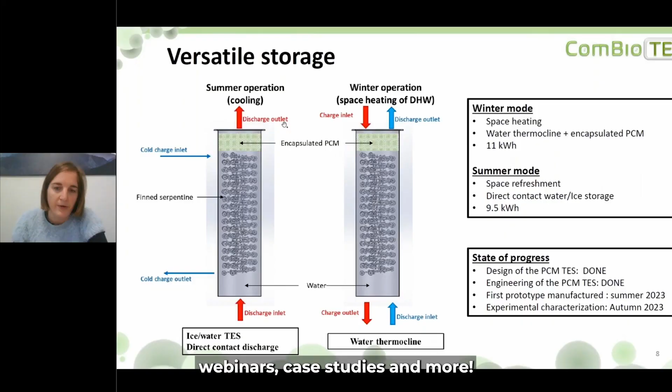Every month we focus on a topic that is key to making Europe's buildings as energy efficient as possible. Exploring that, you can find the latest content such as expert talks, webinars, case studies and more. From architects and engineers to academics and policy makers, we've got you covered.

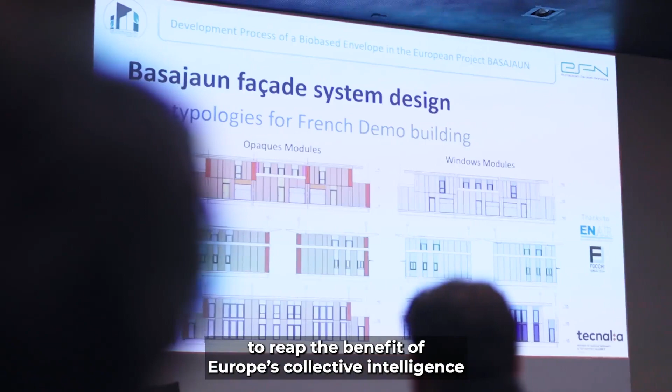Build Up brings together thousands of registered members to reap the benefit of Europe's collective intelligence on all aspects of energy efficiency and renewable energy in buildings.

The Build Up portal benefits from the expertise of our ambassadors. Drawn from industry and academia, the ambassadors bridge the gap between EU and national level and help shape our editorial content. Want to promote your work?

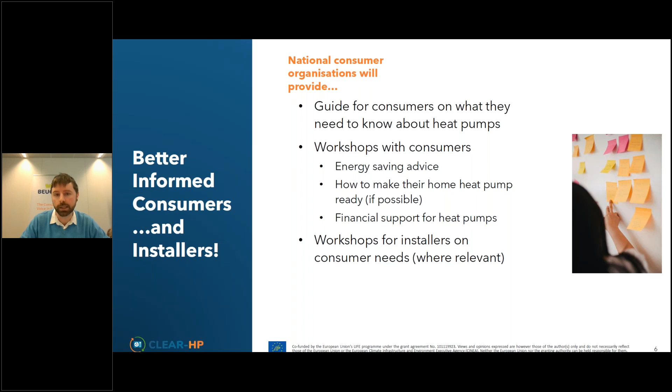They've had a really massive response, a very positive response from installers. One reason being, in some cases, installers can be very small companies, micro enterprises, one or two person companies, and they might have worked in gas or oil boilers for years, and might not have the time or resources to learn about heat pumps, to shift into that world. So that's another thing some of our consumer organizations through the project have already started, which we're really happy to see.

So those are some key points on the project itself. Now I'm going to explain heat pumps from a consumer perspective.

Some of the research we've done internally in BEUC, last year we did a really valuable project called Mystery Shopping, Consumer Experiences when Trying to Buy a Heat Pump, where we got the average consumer who was interested in a heat pump to go through the process themselves of researching what they could find out about heat pumps and how to buy one, having a visit from an installer and getting the quote from the installer, and we've reviewed that whole process.

So here are some of the key questions that consumers came back to us with when we reviewed the process. First one was, where do I get my information? There is a huge amount of information on the internet about heat pumps, and consumers can easily become overloaded, and not all of it is impartial or trustworthy. So they wonder where to get information, which is where the project steps in.

They also have a key question we mentioned earlier: is my home heat pump ready? One of the things we found in this project, which was a concern, was you can get an energy audit of your home, which we would recommend, or you can get a heat pump installer to visit your home, review it, and tell you if your home is heat pump ready, and then they recommend you a heat pump.

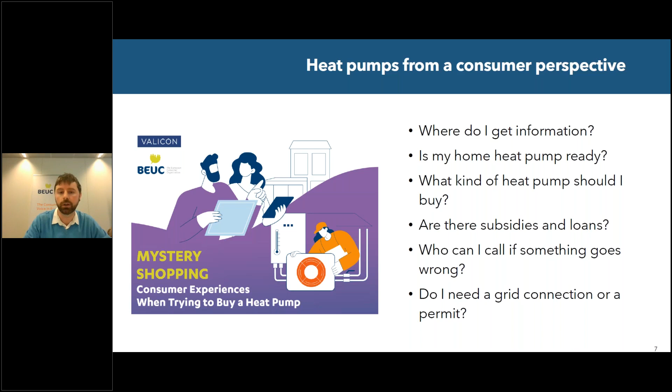So it's a good business case to have good after sales service. And the last question consumers tended to ask was whether they need a grid connection or a permit for their home. There do tend to be problems sometimes with heavily blocked up grids in some countries, and it being difficult to get a new grid connection, which is also a concern that we're trying to tackle through policy.

So what can be done in terms of policy? Just another minute from me. It should be said that there has been good progress at the EU level in the last few years. Look, we have the Fit for 55 package now. We're pretty happy with it: Energy Efficiency Directive, Renewable Energy Directive, Electricity Market Design. Lots of them have been quite ambitious.

And what we need to see now is ambitious transposition at the member state level, something we're going to be working on through this project with our national members. But in terms of things that can be improved, a list of certified heat pump installers provided by the government would be a good place to start. We saw this in Slovenia. We're calling it a best practice at the moment because there's certain criteria that you need to fulfill as an installer to be added to the list that the government provides and regularly updates of heat pump installers.

They also have this type of list in Slovakia, but there's no criteria to get on it. So if you have poor qualifications and are not providing good customer service, you can still be added to the list, which is then not a helpful list for consumers. So there needs to be certification.

Another really important issue you might hear if you dabble in the world of heat pumps: reduce taxes on electricity. We ultimately need not just the upfront cost of heat pumps to come down, we need the running costs of heat pumps to come down. They need to be cheaper to run than oil and gas boilers, because ultimately consumers vote with their pocket, right, and their wallet.

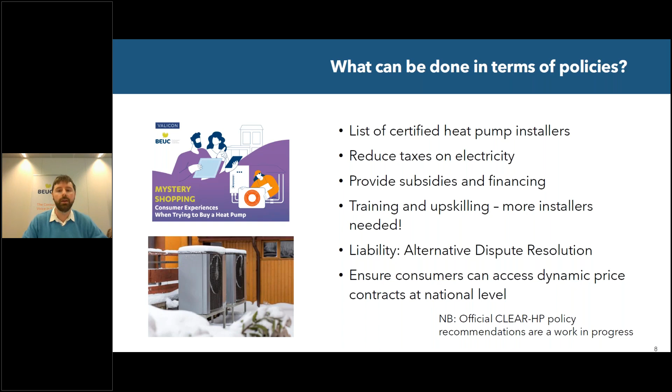Those are the key points from this project. Thank you very much for listening, and I look forward to your questions later. And I'm going to pass on to Street HP.

Good morning, everyone. I'm Pierre-Antoine from Ressorts, and I'm going to talk to you about the Street HP Reno project. Just a quick introduction, I am a member of the Energiesprong team, and our goal is to accelerate renovation of housing and buildings in Europe to the net zero energy level. And now for this project, we are focusing on heat pumps, and I'm going to explain why.

So just to test the slideshow. Okay, it seems to work.

So at first, before explaining the project, maybe a quick introduction about the context, some things that you already know. It's about climate change, it's about the fact that we have to decarbonize quickly our building stock in Europe, but in the world too, because buildings account for 40% of energy consumed in Europe, and about 36% of greenhouse gas emissions. But another topic that is less known is about the social issue.

Now we are seeing the fact that gas and electricity bills are increasing very fast, and that the issue of energy poverty is more and more spread in Europe. Over 41 million Europeans were unable to keep their homes adequately warm in 2022. So we have to succeed in doing this energy jump, transforming our building stock from the current one to a building stock only in class A, B, or C in Europe.

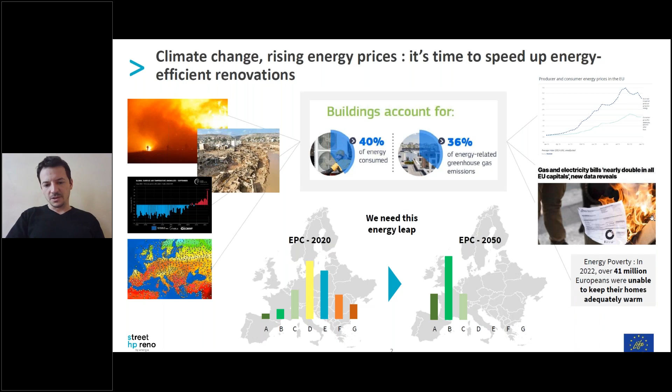If we focus on just energy systems, we know that in the European Union, space heating and water heating are almost 80% of the energy consumption. So it talks about insulation and energy systems, and now we are going to focus on energy systems. But it shows us that we have to make some real choices now in Europe.

If we analyze this energy consumption, we see fossil fuel, and the major part of this consumption is about fossil fuels, fossil gas notably. So we have to change that. But the question now is, if you are a building owner, it's about the strategy you have to apply if you want to change these energy systems in your buildings.

So you can maybe think about gas boiler replacement, but it's about fossil gas. We can imagine that in the coming future we should have green gas, I mean biogas, but it's not already developed in public policies.

And now, after that, you can think about heat pumps, how you can replace your energy systems by heat pumps. But it raises other questions, because it raises the question of which types of housing are adequate for heat pumps, and the way that you are going to do this.

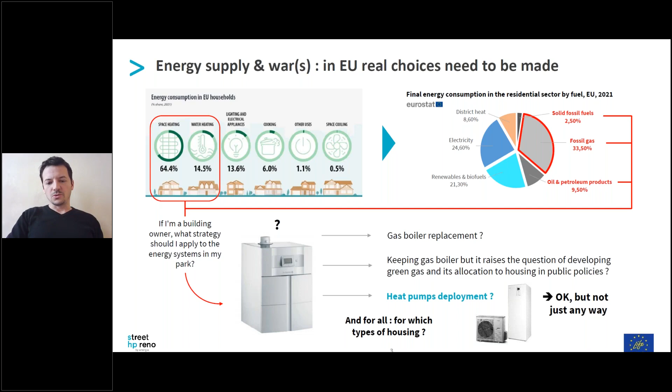So Europe and France want to speed up the deployment of heat pumps to decarbonize residential heating, because we know that heat pumps offer a lot of advantages. It's more ecological and more economical to run than fossil fuel systems, for example.

It's run by electricity, which is decarbonized in France and is being decarbonized in Europe through the deployment of renewable energies. It can provide heating and hot water production. It is really subsidized, and there are a lot of grants offered by governments in Europe. Sometimes it can be combined with other gas boilers, for example, depending on needs. We can imagine hybrid systems.

But the deployment is now progressing, though we see that the pace is not enough. We have to accelerate it, and the fact is it's not always carried out in a relevant manner.

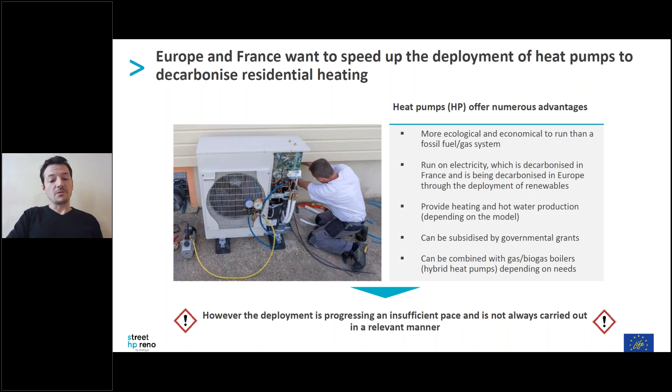Indeed, today there are a lot of obstacles and barriers that we have to tackle. The first one is about the costs. Now we see that the costs are very high, and sometimes they are unclear, because if you ask different installers for a proposal of heat pump replacement, you could have different prices, and you don't understand why.

There is the fact that today heat pumps are deployed in thermal sieves - buildings which are not energy efficient - and it could be a problem because of the efficiency of the system, and the fact that there could be mistakes in choosing these buildings, because there is a risk for the potential energy savings. We are missing energy savings that we have to achieve.

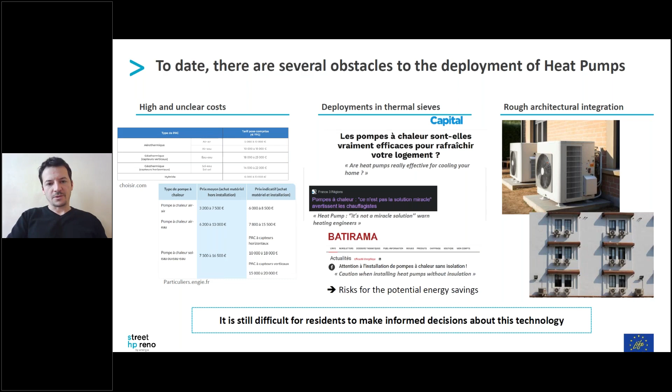And there is the question of architectural integration, which is a factor not thought about today in the way we are deploying heat pumps. So there are a lot of issues and difficulties for residents to stay informed, to take informed decisions about this technology.

If we have a look at the market now, there are a lot of barriers too, concerning solution providers and technologies on the market. There is a risk of scams. It's an issue that we see in France, in Germany, for example, and we have to take care of this.

There is the issue of construction site annoyance, disturbance between homeowners, between your neighborhood, for example. There is a lack of manpower. We know that we have to get more and more installers and solution providers, because there is a lot of work, and there is technical complexity, because not all housing typologies are adapted to this technology.

So we have to investigate to select the good ones that could have their energy systems replaced by heat pumps, and we have to develop tools for that. So it's one of the objectives of our Street HP Reno project. We have to remove this obstacle and accelerate the deployment of heat pumps.

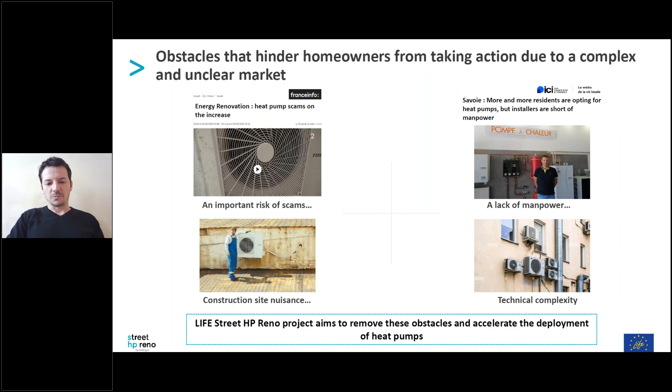If you are a multi-building owner, this raises another question about the renovation strategy. Today there are two possibilities, two ways of seeing things. You have, on the one hand, deep performance renovation that you can make in one step. It's the best business model in total cost of ownership.

There is no need for further intervention before 2050, and it's a gift to the residents, a strong energy shield. But there is another way to see things: renovation in multi-steps, maybe two or three steps for example. It's about volume. The advantage is that you treat more homes in the short term, which is an advantage regarding social issues, because it gives protection to a larger population from fuel poverty and energy shortage. It also addresses legal issues, for example when you have a law forcing you to renovate class E, F, G of the energy performance certificate.

But these two strategies, we know now, don't have to clash - they have to merge, because the first one treats long-term goals and the second treats short-term goals. We have to do both if we want to achieve our goals for 2050.

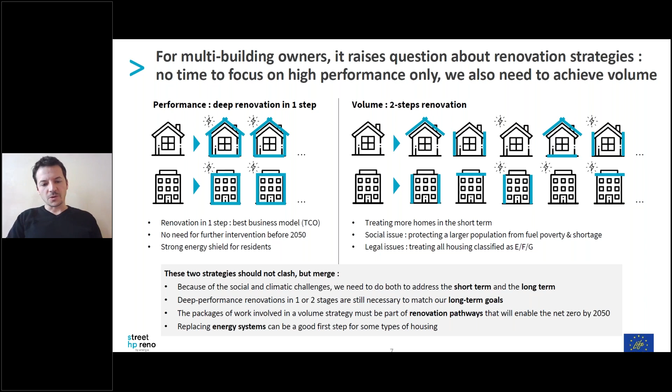If we look at the global building stock, we see that replacing energy systems could be a good first step for some types of housing.

About the net zero pathway to 2050, it's crucial to meet our targets as previously said. If we look at a case study, we see that multi-step renovations lead to a lot of different costs, but the efficiency is less than one deep renovation done in one step. The energy bill reaches a threshold and can't go below this threshold.

So if we think about replacing energy systems by deploying heat pumps, we can't just do it anyway - we have to establish the different pathways, defining the net zero roadmap for each concerned building, because we must not compromise the potential for energy and carbon savings.

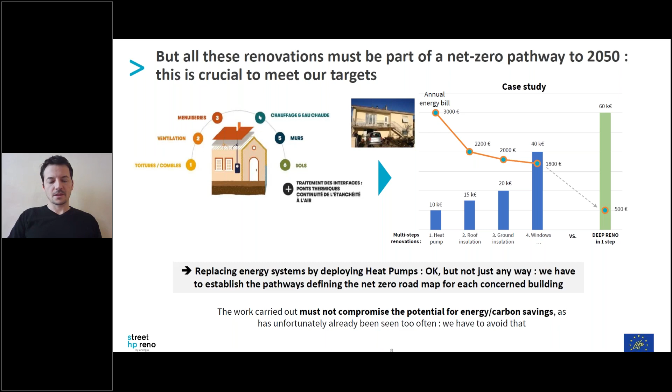Another point of our project - as said previously, we have the Energiesprong team, and we are thinking of industrialized and prefabricated energy systems. This leads us to the question of building typologies.

In the different projects we already have in Europe, we had this sort of system - energy systems containing heat pumps and ventilation systems, for example. We see that we can develop such energy modules adapted to certain housing typologies. So we have to list these different building typologies that are adapted to this sort of energy module, and then develop solutions and energy modules with heat pumps fitted for these building typologies.

You can see on screen some examples of projects in the Netherlands with very efficient integration of heat pumps into the roof and facades, for example. The goal was to have something architecturally very integrated into these buildings.

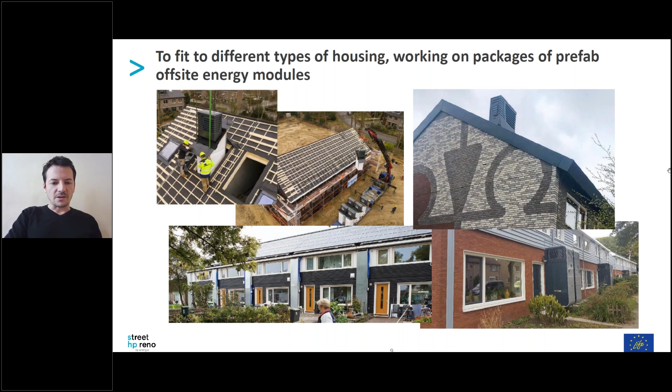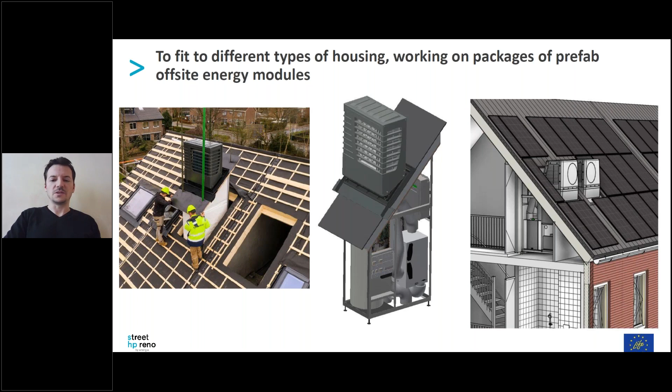Just to focus on this type of system - it's totally prefabricated. The goal of industrialization is to develop systems that are better, with better quality, better energy performance, and that can be put on site more quickly than traditional systems. The main goal is to decrease costs, because we want to deploy heat pumps massively, and for that we have to decrease the cost of these systems. That's the goal of industrialization.

Another example of prefabricated systems - you can see a sort of box placed on the facades of homes, totally architecturally integrated, as previously said.

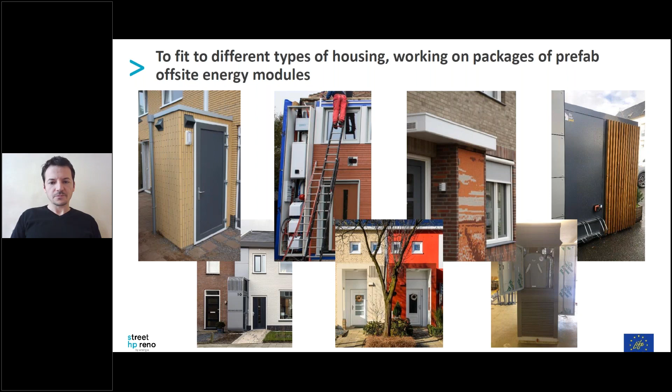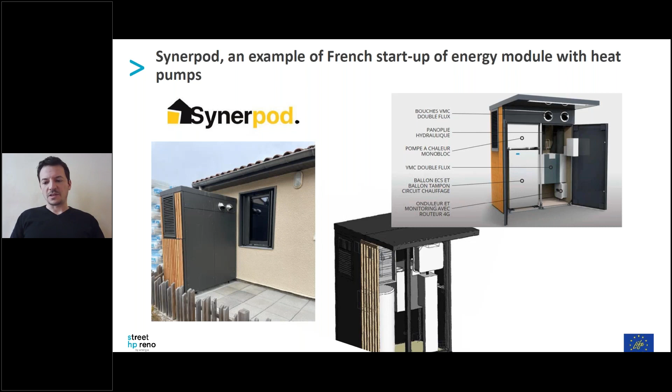In France, we have the example of Synerpod, a startup developing such heat pump systems. You have a picture of this system - it contains heat pumps, double-flow ventilation systems, and provides heating and domestic hot water. You can also have other services, like an inverter for solar electricity production, or an electric device if you want to recharge your car or electric bike, for example. So these sorts of systems make this possible.

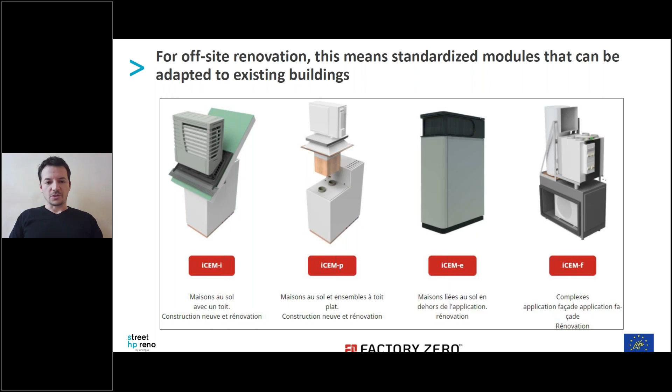The example of Factory Zero, a Netherlands firm developing four types of systems, a package of energy modules that you can put on facades, on roofs, or indoor the building. The global idea is to develop new products that are very attractive for consumers and for renovation, like this example of a system put on the facades of homes.

Now focusing on the project, the goal is to accelerate heat pump deployment, and for that we want to work on two bricks. On one end, the goal is to raise demand from building owners and make them part of group purchases.

So the goal is to find similar homes, for example in the same geographical areas, such as suburban areas where there are a lot of individual homes with similar typologies. This is our target - it is in these neighborhoods that we want to raise collective purchasing.

On the other end, the goal is to raise a catalog of solutions - simple, clear, and industrialized offsite solutions to fit the building typologies we've found. This sends a strong signal to the supply side that there is massive demand, segmented into different types of housing, to help solution providers invest in research, development, and industrialization of their products, and to reduce costs by achieving economy of scale through collective purchase, deploying heat pump installation more strongly.

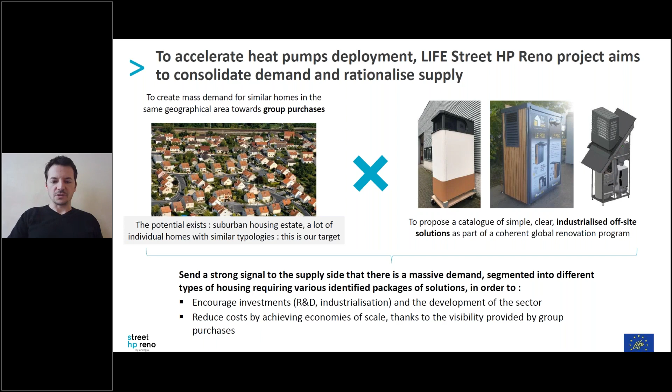About the partners of the project: it's a consortium of 11 partners in France, Italy, Germany, and the Netherlands.

We have two types of partners. We have 7 expert actors in consulting and social and environmental innovation, forming the market development team. The coordinator is Edera, a company in Italy deploying Energiesprong there. In France you have Ressorts, deploying Energiesprong, Pouget Consultant, an engineering firm, and Vraiment, a design agency about ecological transition.

We have two experts for market dissemination: the Global Energiesprong Alliance, the European Association of Energiesprong, and the European Heat Pump Association, which supports the deployment of heat pumps in Europe.